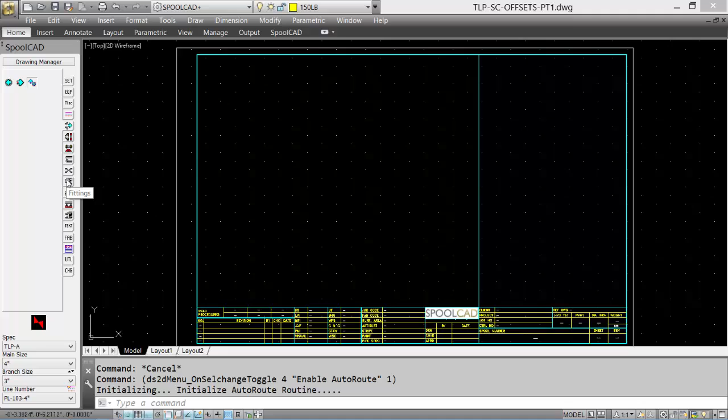Next, we'll select the auto route feature and enable it. This will automate our component placement. Next, we'll go to our fittings tab and start with a piece of pipe, and we'll graphically run a piece of pipe for this sample. You can zoom up on it.

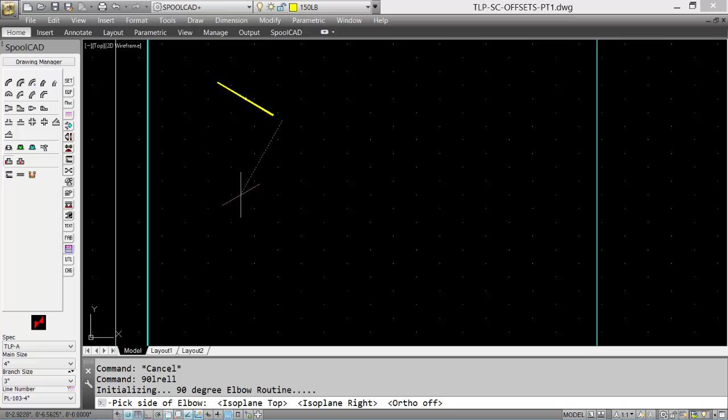Let's add the 90-degree elbow. By default, it's going to point straight down, but we'd like to rotate this 45 degrees. We can take it off our isoplane by hitting the F8 key, which is the ortho, allowing us to free pick. We can then graphically select a 45-degree angle, or what would appear to be one. That looks pretty close, and we'll pick a point. The 90-degree elbow is now bent at 45 degrees.

We can then add in a length of pipe. This is just a vector, and we'll add the pipe to the end of the elbow. Select a reasonable distance, pick a point, and the pipe follows the angle of the 90-degree elbow. We can then finish off with a 45-degree elbow to bring this back to a vertical.

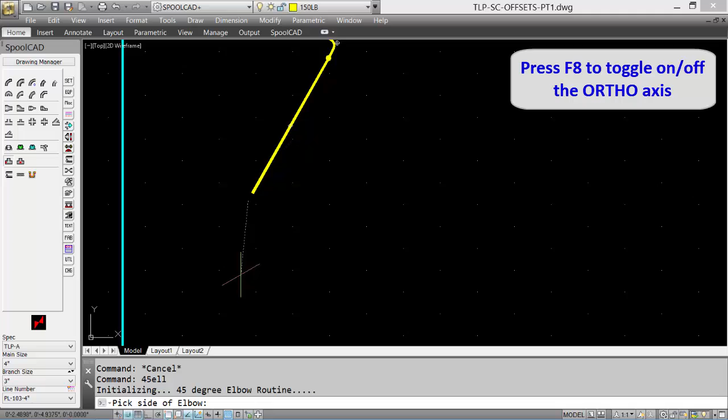To force it to a vertical, again we'll turn on our F8, select ortho, pick down, and it puts in a 45-degree elbow facing down. We'll finish off with just a length of pipe, and there's our simple offset: the 90-degree elbow turned 45 degrees, bending down to a 45.

The next topic in Module 7 is drawing rolling offsets. For this sample, we'll use two 45-degree elbows and create a rolling offset.

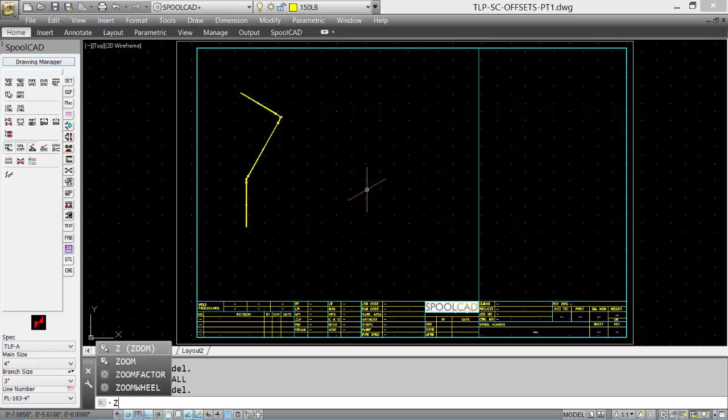We'll zoom up on this area of the drawing. First, we'll check our active settings to make sure they are set properly. Next, we'll enable the auto route feature, and again select our fittings tab, select a piece of pipe, and place it, then select the 45-degree elbow.

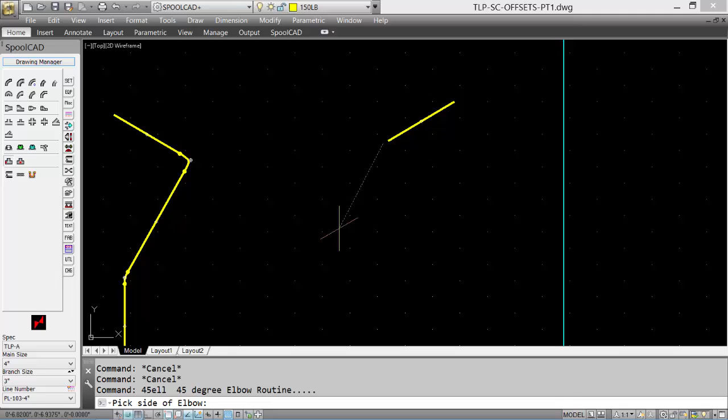Normally, the 45-degree elbow would just come down at 45 degrees in the same plane. We're going to give it the illusion of offsetting by moving it a little bit ahead. Place another length of pipe - again this is just a distance vector - and it will follow the 45-degree elbow.

It follows it down, and then we can place another 45-degree elbow to bring it back to an isometric plane, and finish off with a length of pipe. So there's a rolling offset, giving us the illusion that it's bending over and rolling at the same time.

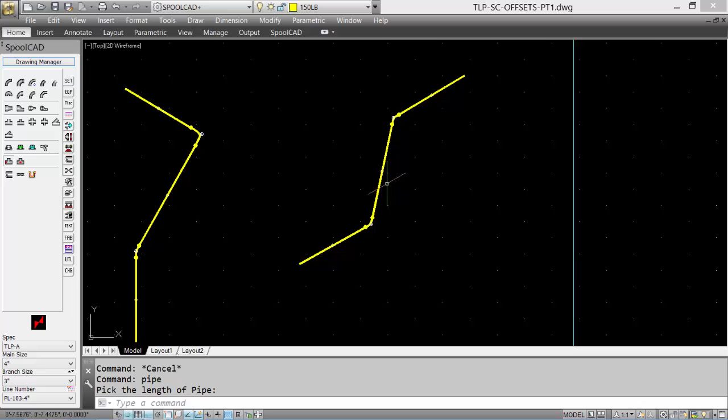Our next topic is placing piping bends. Place a sample bend just down in this location of the drawing. We'll zoom up on it and place the bend in here.

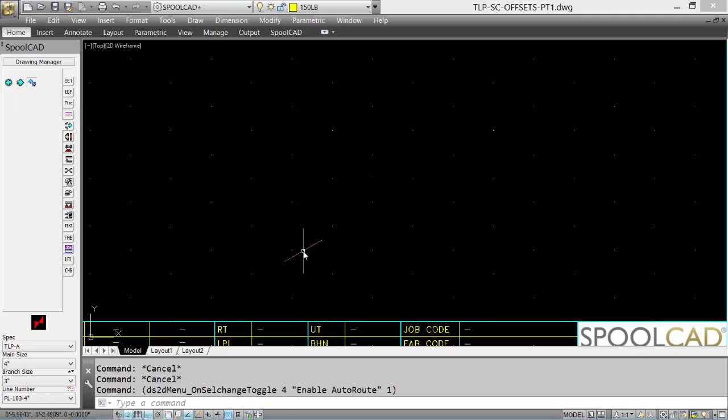Adjust our active settings, enable our auto route feature, and then select our fittings tab. We'll start with a piece of pipe, then pick our pipe bend tool.

The pipe bend dialog appears, allowing us to set the pipe diameter for the bend. We'll use our 4-inch main size. Angle for the pipe bend, set to say 60 degrees. You can either use pipe diameters or actual length for our tangent ends, and we'll just use pipe diameters and set that to 5 and 5.

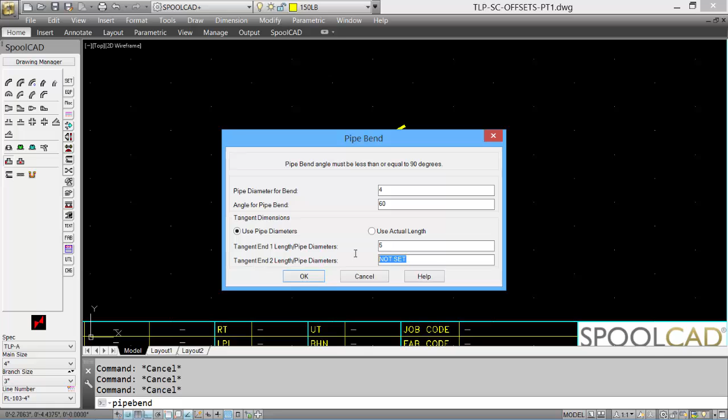So there's 0 degrees, 30. Graphically select approximately 60 degrees - this is about there - and our pipe bend is placed. We'll finish it off with a length of pipe, and our pipe bend is placed.

Our last topic in Module 7 is the dimension tools. Now that we've placed our offset, our rolling offset, and our pipe bend, let's look at placing the dimensions. Select the Utilities tab - we see our normal ISO dimensioning tool.

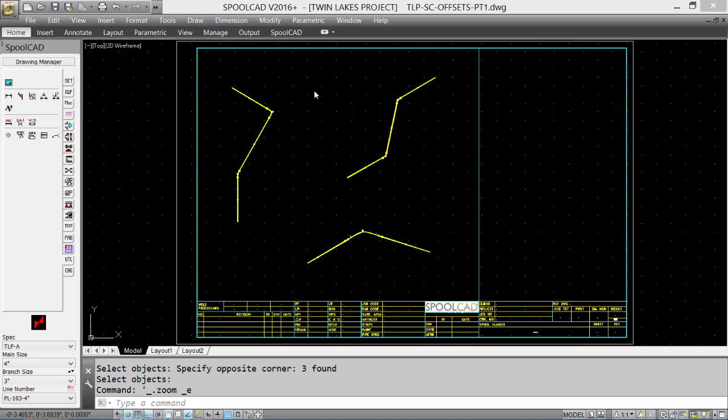We have our offset dimensioning tool and a rolling offset dimensioning tool. Let's start by placing the offset tool. Select the tool, fittings and pipe. Under the dimension mode, select the style. We know that it's a 45-degree angle, so our sides 1 and 2 must be equal. Put in values, click OK.

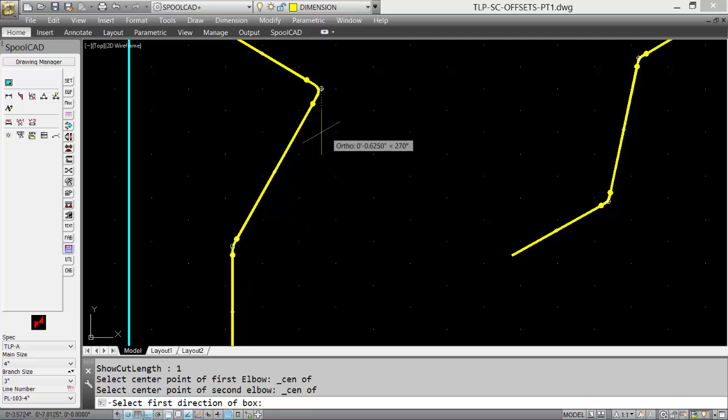We'll zoom up on our offset and pick the center point of the top elbow to the center point of the bottom elbow, and then define the triangle to create. So we go straight down, straight across, and then decide how far away we want that triangle shape and dimensions to appear. We'll come over here, click, and our dimensions are placed - we get the angle, leg 1, leg 2, as well as our true length.

Let's look at doing the rolling offset. Pick the rolling offset tool. This asks for the center point of the first elbow, so we'll repeat from the center of the top elbow to the center of the bottom elbow.

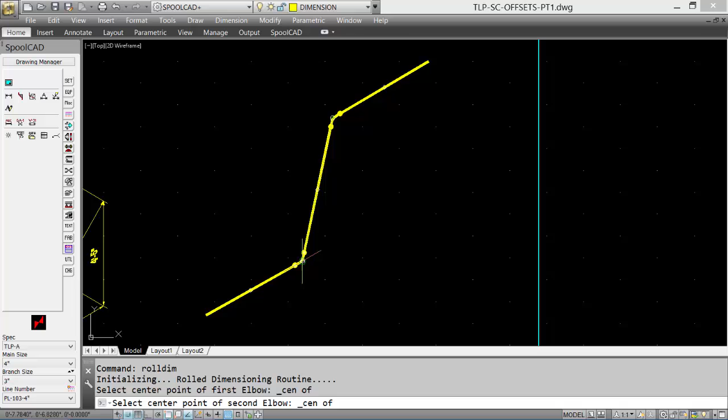A box appears showing a red, green, and light blue or cyan colored line representing the 3 dimensions, and we'll input values for them - these would be known values. Make sure our cut length is toggled on, and we'll click OK.

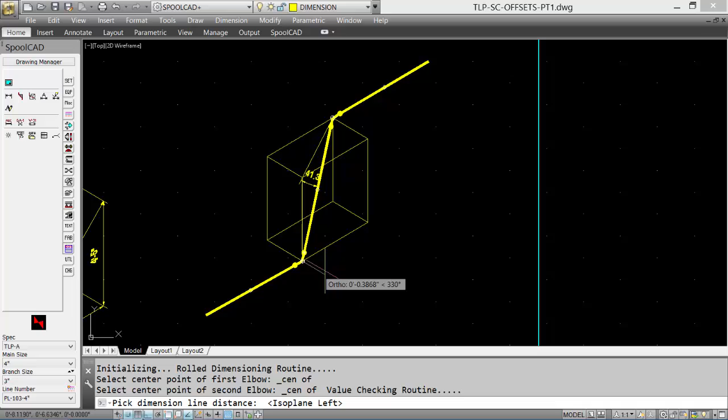We'll pick how far we want the dimensions to appear from the box, and once again the dimensions are placed for our 3 dimensions, as well as the true length, the cut length, and the angle.

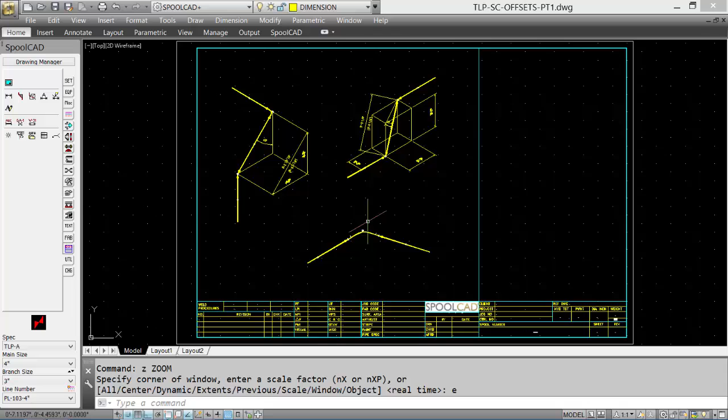The last dimension to place is our pipe bend. We'll zoom up on the pipe bend, select our normal iso dimension tool, check our isoplane, and go from the end to the center of the length of pipe.

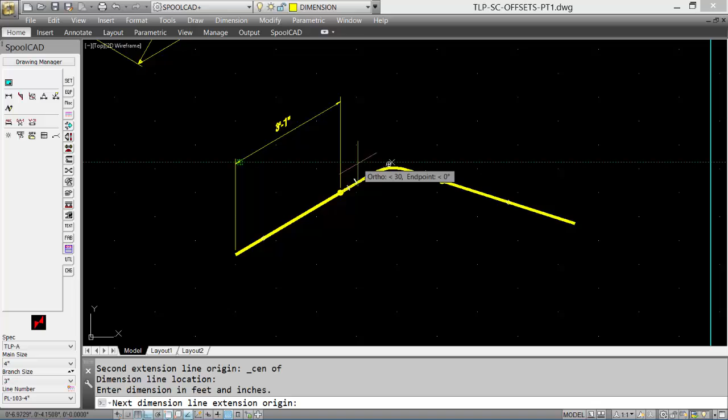We'll put in a value for the length of the pipe, then place a dimension for the straight tangent, which comes in automatically, and then to the center of our pipe bend - the dimensions come in automatically.

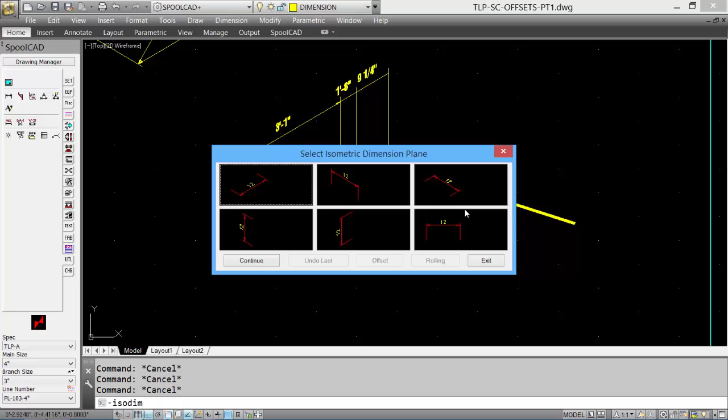We'll finish off this leg of the dimension by using the 6th option in our dimension plane, which is the aligned dimension. We'll pick up the end of this length of pipe, and this is just a dimensional vector for the distance away.

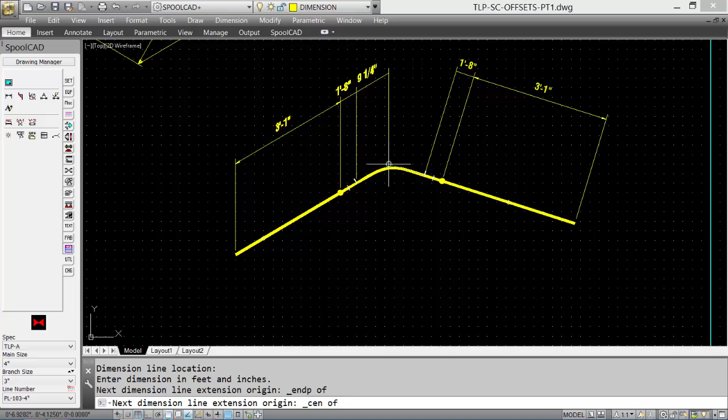End of our straight tangent, and again the value comes in automatically, and then the center - again the dimension is placed from our pipe bend information.

We can use AutoCAD's stretch tool to graphically fix the vertical dimensions, and we're done. Some basic tools for the dimensioning of our more complex pipe routings.

Module 7 is the last module in the ProCAD SpoolCAD tutorials. Review the topics in this module or select another module.